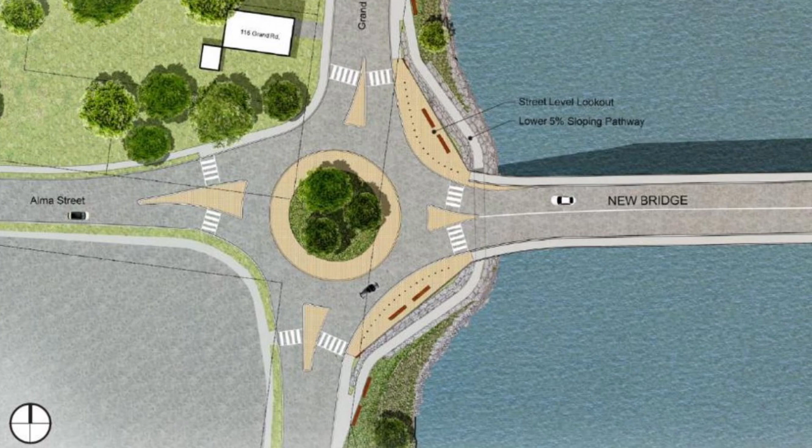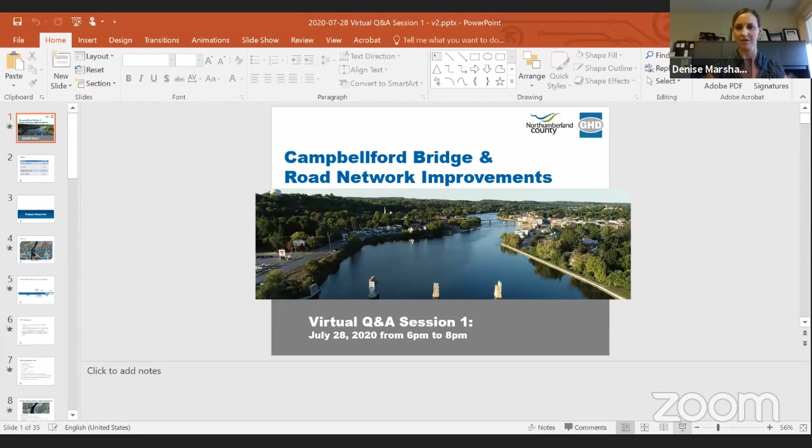I'm Denise Marshall with Northumberland County. We're really happy to present where we're at with the project with the community. It's been a fairly long EA process, and the environmental assessment was approved by the minister in 2017 to construct a new bridge at the location of 2nd and Alma Street. Since 2017, we developed an RFP to retain consultants to start the detailed design process for this new bridge and arterial road network.

In early 2019, we retained GHD, and they've been on board for the last year, and we've been very busy. There's been a number of studies underway to move forward with our design, and you may have seen some of our field staff out doing various types of field work, which Brian will get into in the presentation. At this point, we've reached a 30% or conceptual design stage that we're now ready to share with the public to get your feedback and comments and answer any questions you might have.

We've been doing quite a bit of consultation up to this point with agencies and other stakeholders. This is just extending that consultation process, and it will continue throughout the duration of the project. So with that, I'm going to turn it over to Brian to go through the presentation, and we look forward to all your comments and feedback at the end.

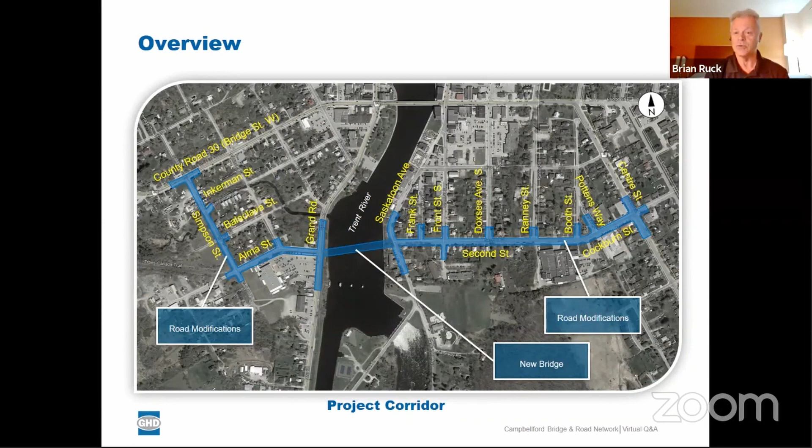The key here is that the bridge is a focal point, but a bridge only works if you have a good road network feeding it. So the project is an arterial road network, and you can see on the screen that there is work both east and west of the Trent River to make the access to the new bridge functional and safe. Denise talked a little bit about this before.

This project, as projects of this magnitude are all the same across Ontario now, takes a long time. A lot of times people get anxious and say, well, when are you doing it? Or don't do it, whatever the case may be. It goes back to the late 80s, and even before that, there were discussions about what happens when the existing bridge needs to be replaced or fixed, and it's already very busy, as everyone on the call knows. There were a lot of pre-studies done up until 2007, and then the EA was approved in 2017, and now we've entered the final design phase.

So it's important to appreciate what is possible with respect to feedback now. The EA having been approved by the province means that the bridge is going to happen sometime, and it's going to happen in the location that the EA identified, within a couple of meters one way or the other.

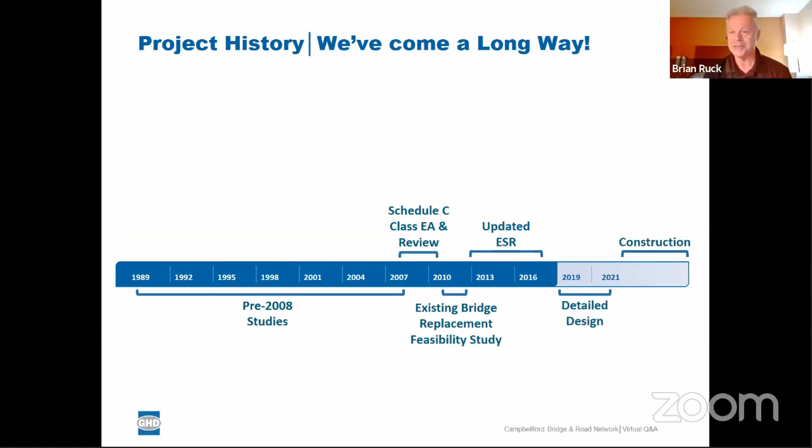So the ability to say, you can still not agree with the bridge necessarily, but the fact is it's still approved and it will happen at some point in time. When an EA is sent to the Ministry of Environment for review and approval, it often comes back with commitments that the proponent, in this case the county, has to address as the project continues to unfold. Now, for a project with this amount of interest and controversy, some of the EA commitments were fairly straightforward.

One was talking about road salt management, and we see that more and more. Road salt is something we're looking at addressing all across the province because of its potential environmental impacts. Every new bridge and significant roadway we're working on, the next point about cycling lanes and pedestrian facilities is something being discussed in every instance, and in most cases, all new infrastructure that's going to last—because a bridge like this will last for 75 years as a minimum after construction.

So even if you don't have the demand for this type of accommodation, the road network and the bridge is not just for cars and trucks. It's for people and for people in mobility. So we talk more about mobility than vehicles. What we've tried to do with the design is make sure all users of the corridor are addressed—not just cars, trucks, fire trucks, and whatnot, but also people walking their dogs and people on bicycles, whether you're a commuter cyclist or a recreational cyclist. So all of that gets factored into the plan.

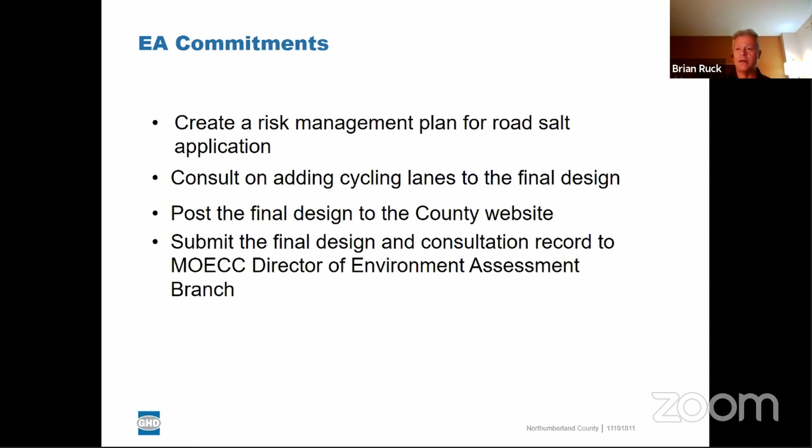And the last two are very simple: the final design will be posted on the website, which would happen regardless. And then the final design and the consultation record, which is a very important part of what we're doing—and that's part of what tonight is all about—gets submitted as well to ensure that we actually have consulted with people and not just heard you, but actually reacted to what you said.

Denise was talking about this. There's a lot of work that you may or may not have observed. Survey work was one of the first things undertaken. Some confirmation of traffic work happened during the EA, and has been updated for the detailed design, along with a number of environmental specialty areas in terms of terrestrial, fish, archaeology, those kinds of things. Most of that has been completed. There's still some archaeological work that needs to be undertaken, potentially even an underwater archaeological study, and we're still working through the details of that.

One of the first things a design firm like ours does when selected for something like this is look at the design that was previously approved and look at ways to identify improvements if possible. A lot of that comes from not saying the work done before was incorrect, but when we have additional information like survey work and some other things, it gives us the ability to look more deeply and more accurately into some other alternatives.

Propose the cross sections for the roads and bridge—you'll see more about that later. There has been a lot of consultation with agencies already, particularly with Trent Hills, and they've been fabulous. Their input is invaluable to hear what the community is thinking and feeling. And Parks Canada as well, because they are the custodian of the Trent River in this area, and part of the heritage network and all of that with the Trent Canal system.

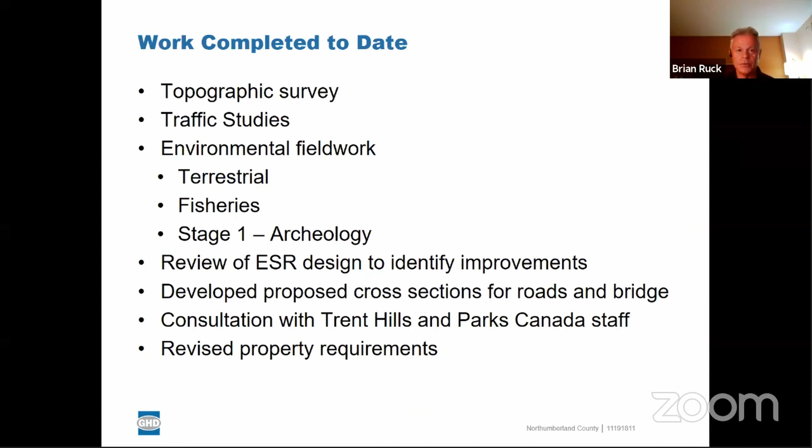One of the things we'll talk a little bit about in the presentation as well is the EA, and the EA had identified property requirements. The nature of a project of this type in an urban area is that you can't construct something like this without having some impacts to property. So the EA identified a number of different things: some homes slated for full buyouts, and some homes and businesses where there's just a partial taking or partial requirement to purchase property to construct the works. During the revisions, one of the things we always strive to do is make that as minimal as possible while still maintaining the facility to all the standards it needs. So we've been able to reduce the property requirements fairly significantly.

So what's changed from the EA? A lot of you may have participated and been aware of what the plan was. At Grand Road and the west end of the bridge, the original proposal was for a signalized intersection, so a set of traffic signals and a left turn lane, various turn lanes in that location.

During the environmental assessment, a roundabout had been explored. Since that time, I have to tell you, roundabouts, I've been doing this for a long time in Ontario and elsewhere. And 10, 15 years ago, the question you'd get from people in agency is, why a roundabout? Now, many years later, after many successful implementations, it's why not a roundabout? We've been able to revise the design that was done in the environmental assessment and propose a modern roundabout at the location instead, which gets rid of the need for traffic signals. I'll talk more about the benefits of roundabouts compared to signals in a few minutes.

Frank Street, located just on the east side of the new crossing, was identified as a closure from 2nd Street with a cul-de-sac, so a turnaround. It would be so there's no access there. We have looked at a few options of doing something a little bit differently there, and one of the options we came up with was a shared, one-way laneway on Frank Street.

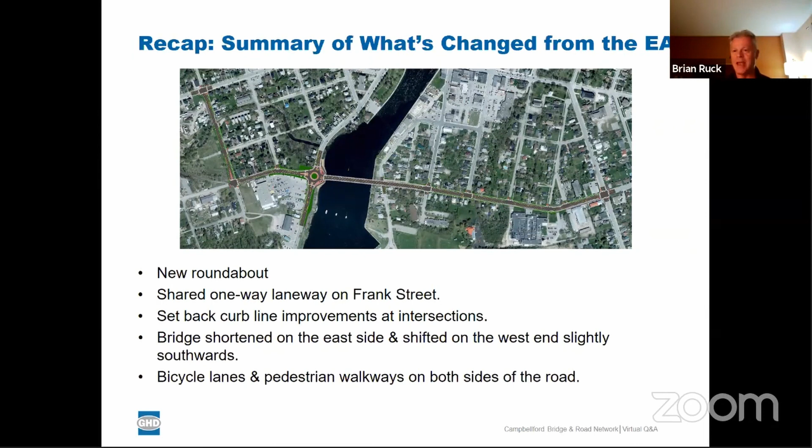I mentioned earlier about the EA commitment about the active transportation facilities, we call them. So we have added bike lanes and pedestrian walkways on both sides of the road and the new bridge, and you'll see cross sections of that as well.

So if we get into the conceptual design, this is what the bridge looks like. This is a combination of artistic renderings and actual on-ground features. So it gives you a pretty good idea of what it might look like, or what it's likely to look like. Key features in this shot are the roundabout at Grand Road, and the bridge, which is the centerpiece of the project. To your left, that big parking lot is Canadian Tire, and just to the south is Tim Hortons, and I'm sure most of you already know that.

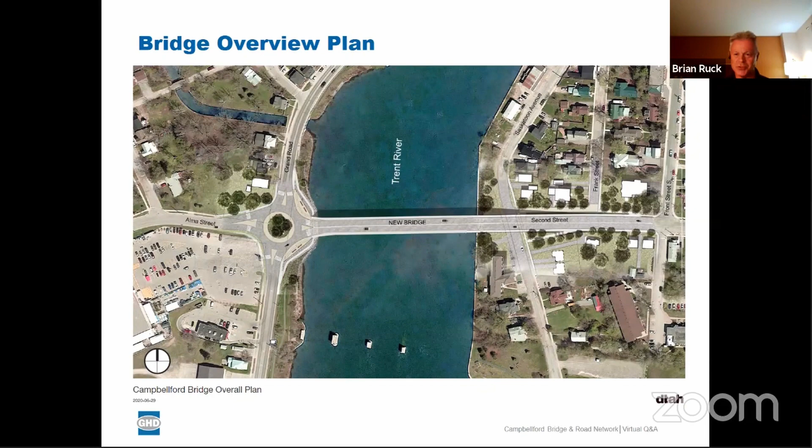On the west side, as I mentioned earlier, this is a material change from what was approved in the EA. The environmental assessment looked at a roundabout, but it sort of held the west side of the Trent River bank, and didn't intrude into the water very much. Now, we have talked to Parks Canada about putting some rock fill in there, which is actually creating some fish habitat, which is a very beneficial thing. And by doing that, we were able to move the roundabout slightly to the east.

That has allowed us, if you see in the top corner here, there's an existing home here and so on to the north. The EA roundabout required the removal of 4 homes on this side. Our proposal is only requiring this one house on the corner. Impacts to Canadian Tire are virtually minimal.

We are proposing a single lane roundabout with pedestrian crossings, and an interesting feature, these are lookouts, benches to look out onto the river. There is a pathway, so those of you walking along the west side and enjoying a nice leisurely stroll, or a bike ride, and coming to the new bridge, we have a pathway that goes down and under the bridge and then up the other side. So there's no need to actually cross traffic if you're continuing just north-south.

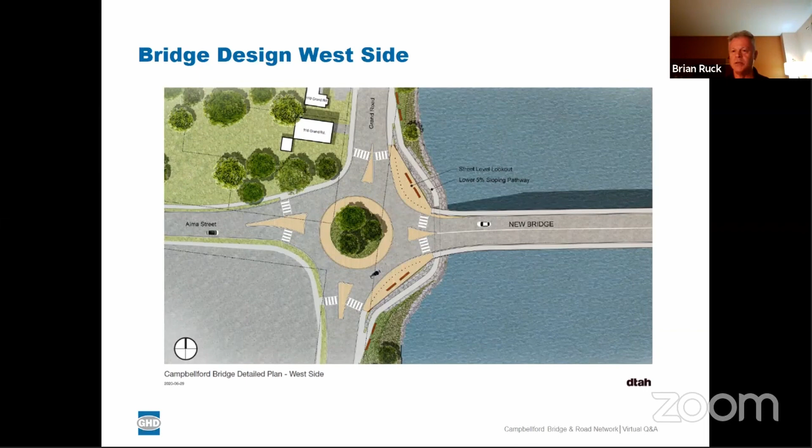On the east side, this is Saskatoon Avenue. The old bridge went as far as here and required Saskatoon to move slightly to the west. We've been able to maintain Saskatoon Avenue in its exact same location, but eliminated what we call the east span, which has actually shortened the bridge and will save a little bit of money.

On Frank Street, I mentioned earlier there was a cul-de-sac, a round bubble that allows vehicles like snow plows, garbage trucks, and recycling trucks to turn around, since they can't turn around in a street this narrow. This shared use laneway, as we're calling it, is a connection between Saskatoon and Frank Street. It's only one direction and narrower than a roadway, going easterly and then northerly on Frank Street. That was the proposal we put forward.

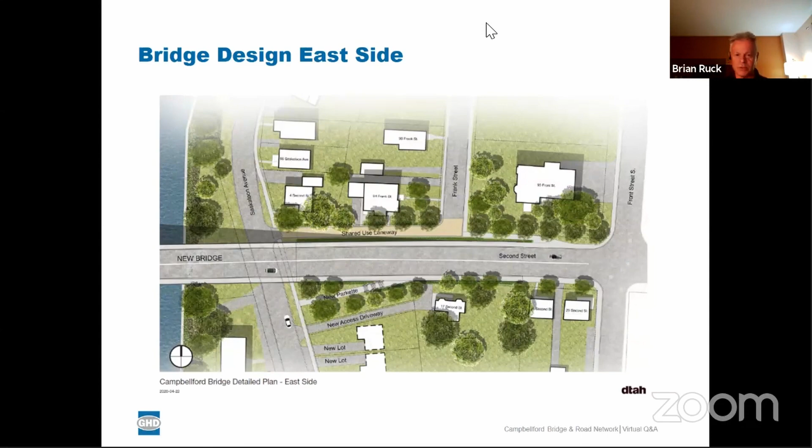Pretty pictures are always nice. Aesthetics is a very important part of this project, as is maintaining the heritage and culture of the town, which is very impressive and enviable to many communities. We've engaged a landscape architect and a bridge architect to make sure what is constructed fits the landscape properly. The firm we picked has done a lot of work in Ottawa, including some impressive crossings of the Rideau River, so we're borrowing some of those ideas.

One neat feature, if you look at this top left image, is the cross section showing what it'll look like crossing the bridge: a lane of traffic each way, a bike lane on the roadway in each direction, and a concrete barrier wall to protect vehicles and pedestrians. We have to protect vehicles from leaving the bridge and ending up in the river, so this barrier wall does that, protecting vehicles from leaving the roadway.

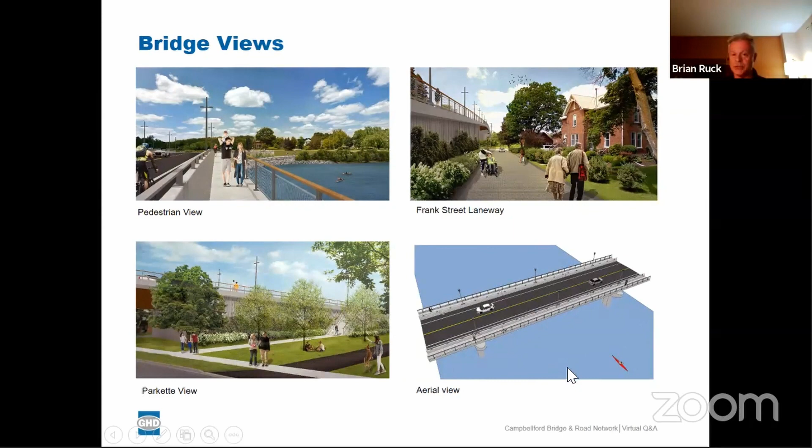Here's an aerial view, and a better one of the bridge, again showing the two lanes, one in each direction, plus the bike lanes, pedestrian areas, and lighting. This shows it a little bit better.

One of the things we're really looking for feedback on is aesthetic features. There are a number of different options we've investigated, and both have been used in Ontario before. One thing we want to make sure of when constructing something like this—earlier I mentioned the bridges last 75 years—but they don't last 75 years without maintenance.

What we don't want is to construct something that requires a lot of maintenance or looks good the first year and then looks lousy afterward. So all the materials selected for railing types and similar things are very durable and rust-free, requiring no more maintenance than the bridge deck would normally require. Typically they have to be fixed up every 25 years or so, depending on usage and other factors.

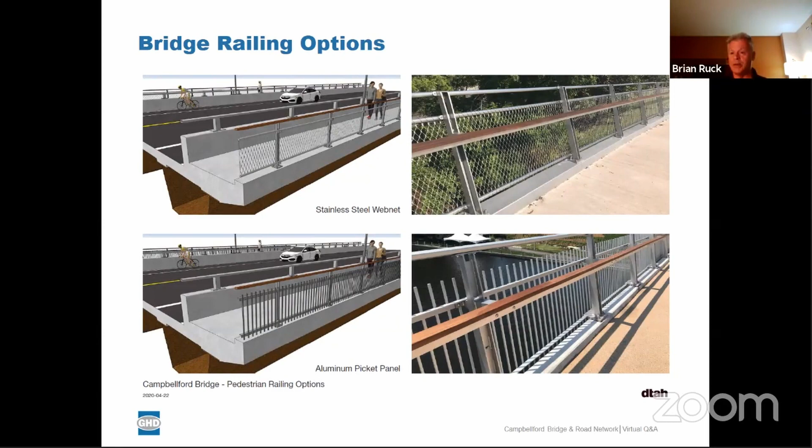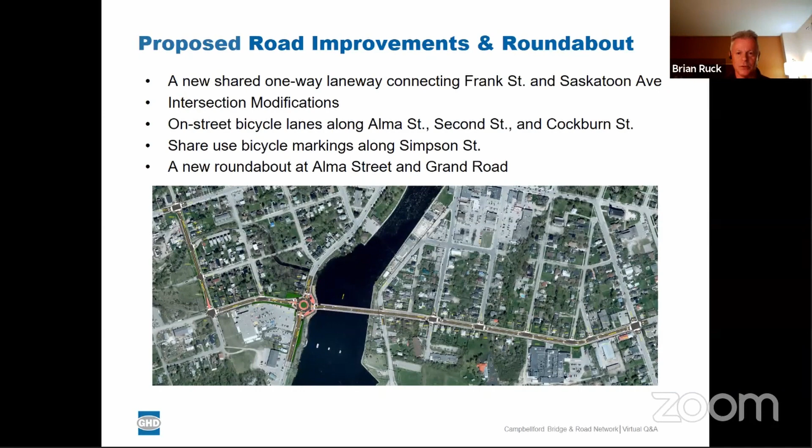So, proposed road improvements include the roundabout and a one-way laneway from Frank Street and Saskatoon. There are a number of intersection modifications required to make the road network function more effectively. On-street bicycle lanes are being added along Alma, 2nd, and Cockburn, with shared-use bicycle markings along Simpson since there isn't enough room for a separate facility. The biggest new feature is the new roundabout at Alma and Grand Road.

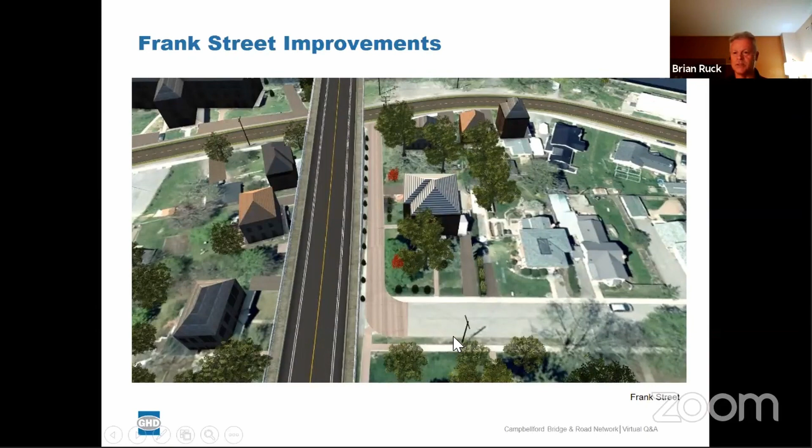At the very west end of the project, at Bridge Street and Simpson, this is one of the areas where a property requirement hadn't been identified in the environmental assessment. However, in order to make this intersection work properly for larger vehicles, we've had to pull back the existing curb line so vehicles can turn without entering the far lane. If someone's waiting to make a turn or go straight, we want vehicles turning right not to interfere with them, so we do have a small property requirement here to address that.

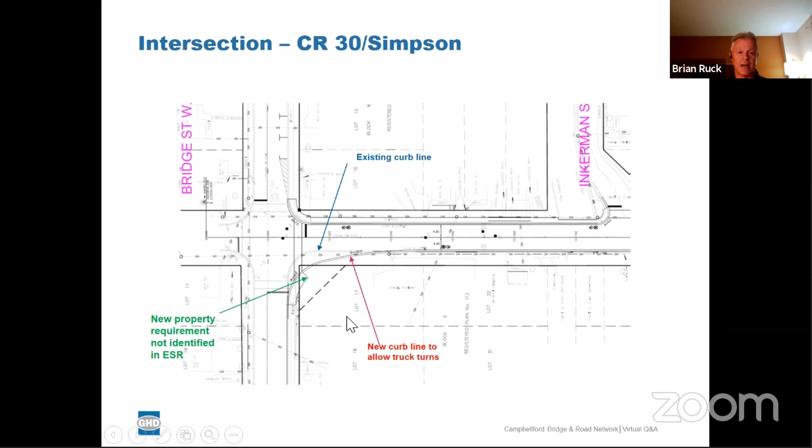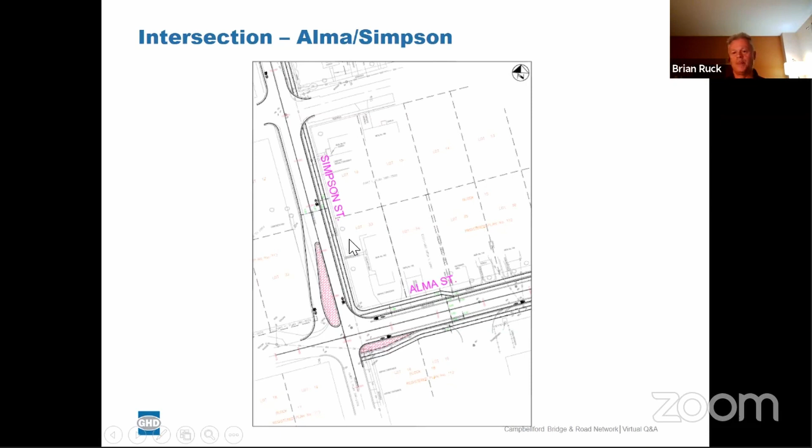The intersection at Alma and Simpson also wasn't addressed as well as it could have been in the EA, in terms of how larger vehicles like a school bus, fire truck, or delivery truck turn, particularly if two arrive at the same time. The current intersection couldn't accommodate that. So we've flared out the southbound piece and provided a small island so that one vehicle can turn this way and another can turn that way without conflicting with each other.

The other area where there hadn't been a property requirement is at the far east end of the project, at Cockburn and Center Street, where similarly we have to pull the curb line back for the same reason, to provide what we call sight triangles. This allows you to see more readily up and down the road, making it safer to make your movements.

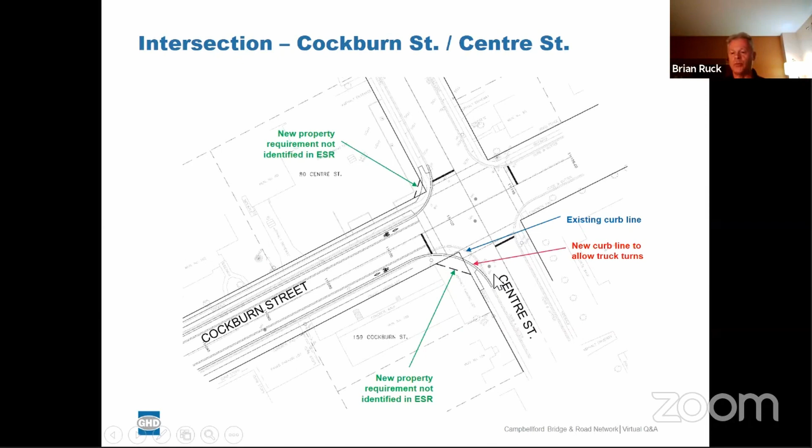We talked earlier about what the road improvements would look like, but I'd rather call it a corridor improvement, a mobility project, because it isn't just for cars and trucks. That's quite a departure from how we used to plan roads 10, 15, 20 years ago, where the focus was making sure cars and trucks could get through and hoping pedestrians could find their way. Now it's a very different, integrated approach to planning.

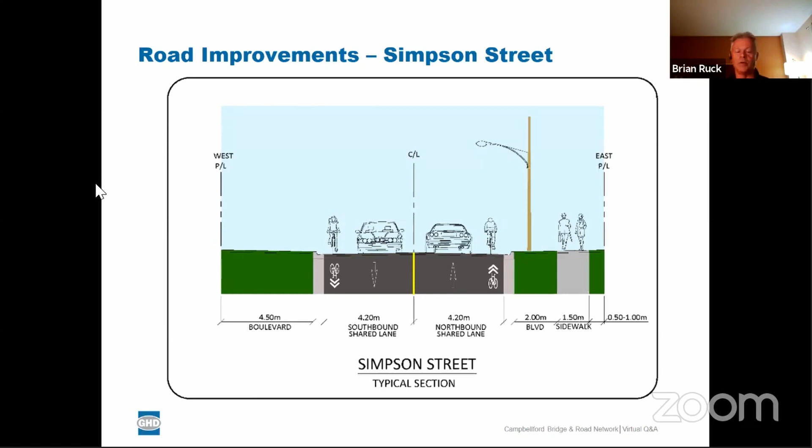You can see here we have a single lane in each direction for vehicles, on-road bike facilities for commuter bikes, and sidewalks on one side on Simpson Street. On Alma, it's a similar design with on-road bike facilities and a meter-and-a-half, or about five-foot, sidewalk. These sidewalks are wide enough that two people in wheelchairs approaching each other can both pass without having to enter the boulevard.

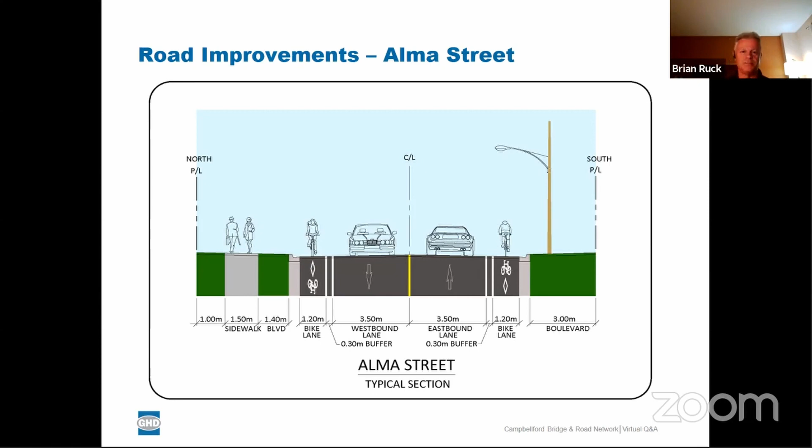On 2nd Street and Cockburn, we have sidewalks on both sides along with on-road bike lanes, and again one lane in each direction for vehicles, plus boulevards that pull the sidewalks a bit further from the road. This makes it more pleasant for people walking, and also gives us somewhere to put the snow in the wintertime.

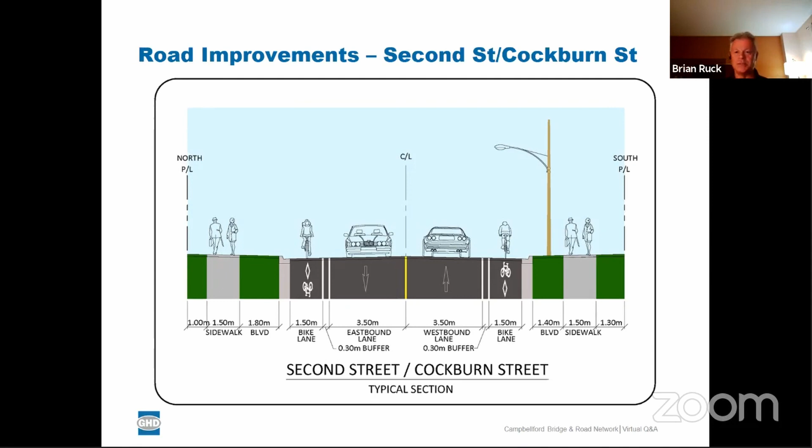As I mentioned earlier, there's been a real change in approach in Ontario and the rest of North America in the last 10 to 15 years regarding roundabouts. A lot of it has come from familiarity, quite frankly.

When anything is new, people are a little afraid of it potentially because they're not sure how to drive it, not sure if others know how to drive it, how to walk through it, how to cycle through it. The reality is those initial fears may be somewhat founded, but as you see more of them, they really are fairly easy to figure out.

The reason they're becoming so popular is quite frankly because they are a lot safer than a signalized intersection. People often think that if you throw up a set of traffic signals, all your safety issues go away, but that's not the case in many areas because you still have the ability to have high speed collisions.

A lot of people on the call may be drivers, and we've probably all experienced near misses where you're waiting to turn left at a signal and you're not quite sure if the oncoming driver is going to stop on the yellow or almost red light, or come through. Many of the serious accidents at signalized intersections are exactly those turning maneuvers, and they happen at high speed, leading to injuries and unfortunately fatalities at times.

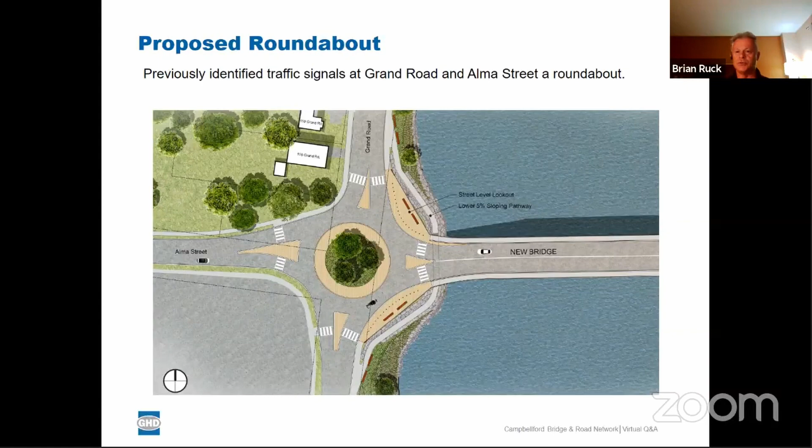Roundabouts virtually eliminate that. They really control speeds because you simply cannot navigate through a roundabout quickly—the operating speed is usually about 15 kilometers an hour or so. So by nature it slows traffic down. Often at an entryway to a community where people have been driving at high speeds on a provincial highway or county road, this tells drivers their driving pattern needs to change, and it really encourages them to change their driving behavior.

There's a lot of stats out there about the traffic calming effects. But the real critical one, in my view, is that injury collisions are reduced 75% and fatals by 90%. We'd love to see that at 100%—all of us would like to see those numbers at zero, no fatalities, no collisions—but the reality is they happen sometimes. So can we do something to mitigate their impacts? That's really what this is all about.

The other benefit is not just safety, but traffic flow. Have you ever come up to a signalized intersection in off-peak hours, hit a red light with nobody coming the other direction, and wonder why you're stopped? Well, at a roundabout you don't have to stop—you only stop if there are vehicles in the roundabout, otherwise you're free to go. By virtue of that you get reduced emissions and decreased fuel consumption, which is good for all of us as we try to green up our planet.

Active transportation at roundabouts is one of the most challenging topics—people have a misunderstanding that roundabouts are more difficult for pedestrians and cyclists. In fact, the reality just doesn't prove that out. It's true it may take a bit of getting used to, but we'll show you a couple of things we've added since last time about how people navigate that.

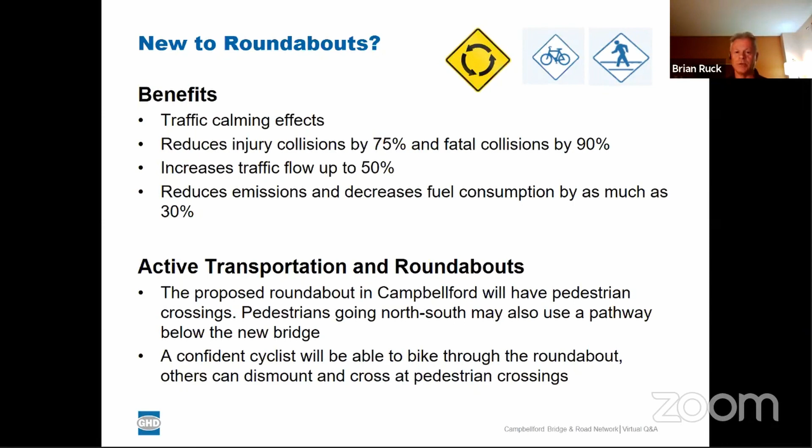We'll talk a little bit more about that in a minute.

One criticism we've heard is that a roundabout can only handle cars. What about a fire truck? What about a school bus? Or, something that's come up quite a bit lately, what about large farm vehicles? We were doing a project for Region Durham on Taunton Road, where 3 or 4 new roundabouts are proposed, and that was a big concern of the farming community: we have these extra large vehicles, so how are we going to get through? We designed our roundabouts at the concept level to make sure all of those vehicles can safely navigate through.

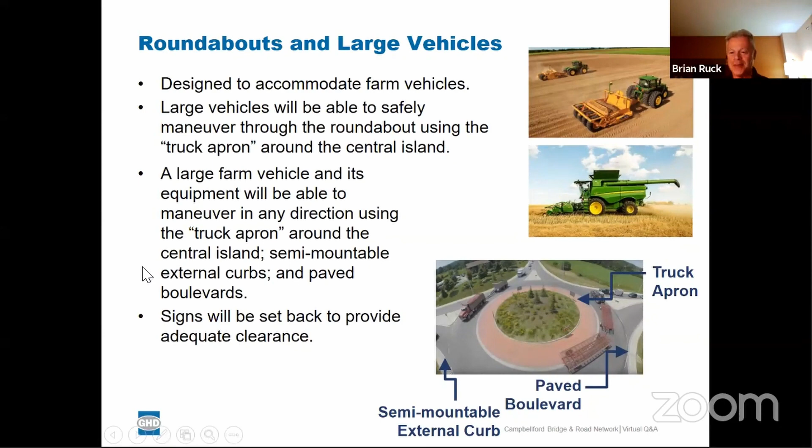Normal sized vehicles use the paved roadway, while oversized vehicles track onto what we call the truck apron. This is still a paved surface, usually different colored asphalt, but the vehicle tracks over it. You can see how this double trailer is tracking on that, but it can still make all the moves very safely. The other thing we can't forget is to place the signs far enough back that one of these big vehicles doesn't knock them all down when it goes through. That's something we make sure we do as well.

I'm just noticing that I think you have our version of the July presentation. Oh, so you're going to flip back. You're going to give me the new version. I'm going to take over and allow you to talk about the accessibility that we've added. All right, so I'm going to stop sharing there, and you're going to give the new version.

This is something we have added since the last time. We heard from some visually impaired people about, okay, what about me? How do I get through something like this?

So, the crosswalks. Let's talk about cyclists first. A confident cyclist will ride through the roundabout with the vehicles. Others who don't feel so confident doing that can get off their bikes and act like a pedestrian through the roundabout. Now flipping over to how pedestrians occupy it.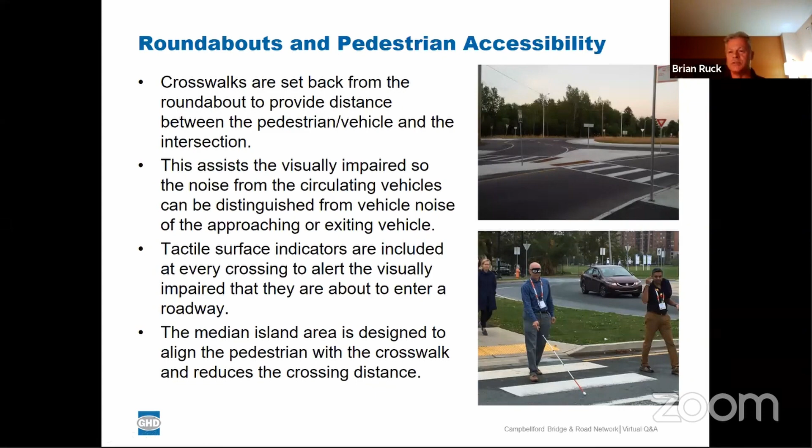It helps people who are visually impaired because they can hear the noise, getting their cues from something other than seeing. These tactile surfaces let them realize they're coming to a crossing, that they're not on a sidewalk any longer. The median here provides a refuge, so people are only crossing one lane of traffic at a time. That's a real benefit compared to a signalized intersection, where you'd be crossing multiple lanes at the same time.

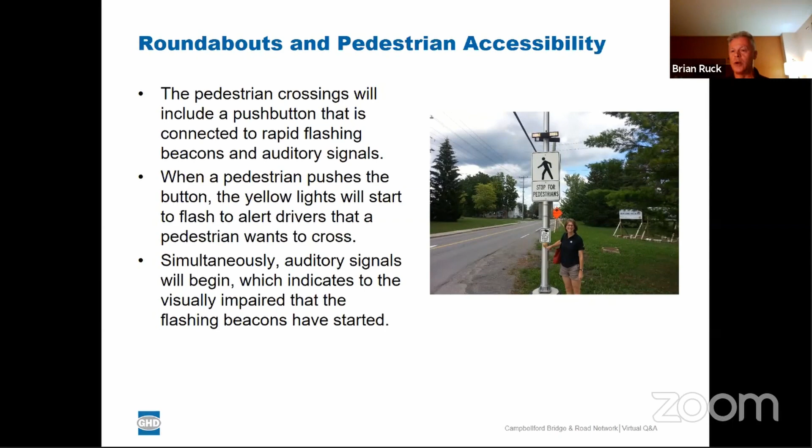That's actually our traffic engineer, Vanessa, who's probably much more qualified to talk about this than I am, but nevertheless, I'll do it. There are other things we're proposing to add to really help with that, including an on-demand pedestrian signal crossing. You push the button when you want to cross, the lights activate, and it tells drivers there's a pedestrian waiting to cross. Then the vehicle has to yield, as they do at a regular intersection, to the person crossing. We will also have auditory signals, so people can hear that the signals have been activated.

And I talked about that.

Natural environment was obviously a big thing during the EA, and it continues to be during the design. So, trees, landscaping and vegetation—some landscape vegetation will have to be removed during construction. But as I mentioned earlier, we have a landscape architect on board to enhance the landscape once we're finished. It's normal practice to make sure trees and vegetation are only removed during appropriate times of the year, so it doesn't affect breeding birds.

Chimney swifts, and various species of at-risk bats—if they're identified, and really they haven't been to any great degree in this area, there will be targeted surveys completed at certain times of year. These are very time sensitive, to ensure that any species at risk identified is appropriately managed. And of course, fish and vegetation within the Trent River.

With proper mitigation, there's a couple of things. First, there's the construction impact itself, where we're in the water building piers, and that's very tightly controlled. The Trent River in this area has mostly a rock bottom, so there isn't a lot of sediment around, which is beneficial for us. But the areas around the construction zone within the water will be contained, so any silt churned up by construction operations will be contained. And as I mentioned earlier, we have the opportunity with the pathway we're proposing on the west side to actually create some additional fish habitat and breeding habitat as well, so that's a benefit too.

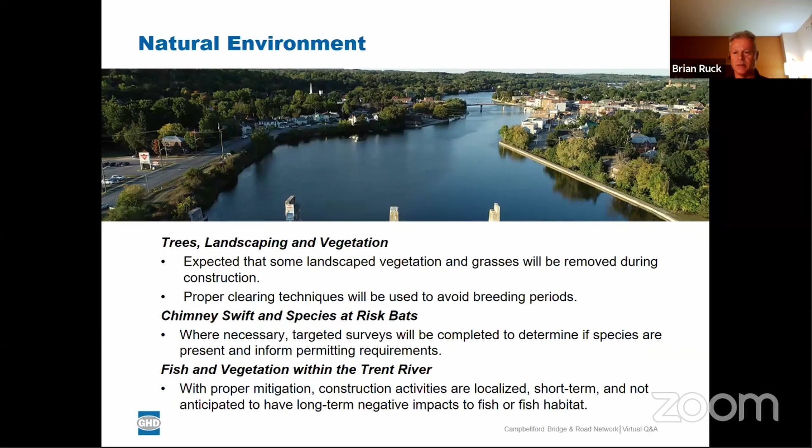Archaeology - the area is for the most part built up, so there isn't a lot of archaeological potential. There are a couple of areas being investigated now during what we call stage 2, which is digging test pits to see whether areas identified as stage 1 that had some potential actually do. You may or may not have witnessed some of that work - there isn't big bells and whistles going on with it, it's people with shovels digging small test pits. That'll be completed by this year.

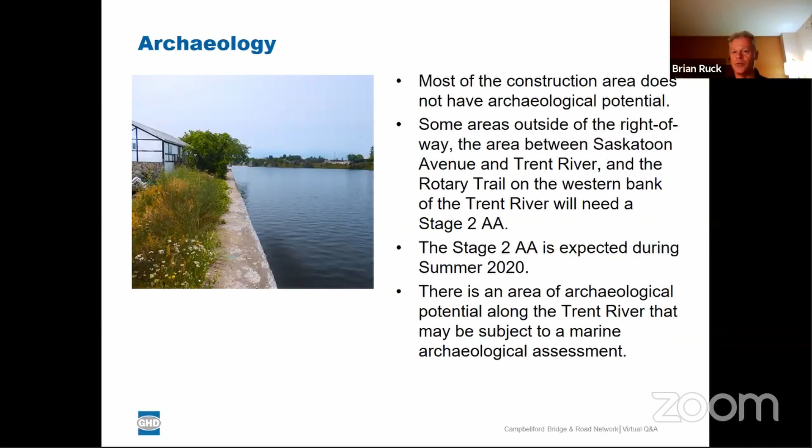And I mentioned earlier that there is an area in the Trent River, potentially in the crossing area, where we may need to do an underwater archaeological assessment as well.

Cultural heritage, designing with the Trent River - we are very conscious of the heritage value of Campbellford, and the new bridge is not going to be an ugly 401-type functional bridge. It's going to be very sensitive to the colors and natural heritage of the area, using materials that blend in, using design features that are sleek and very attractive. We want to collectively walk away with something that everyone is very proud of.

There are a number of heritage properties in the area of construction. There's a couple of homes that definitely have to be removed at 120 Grand and 109 Saskatoon, and that's the area where the potential parkette could be put in. There are a couple of other homes that are going to have some impacts, and we're working towards that right now. There are an additional 42 properties of significance along the road improvements, but not directly impacted by any of the work.

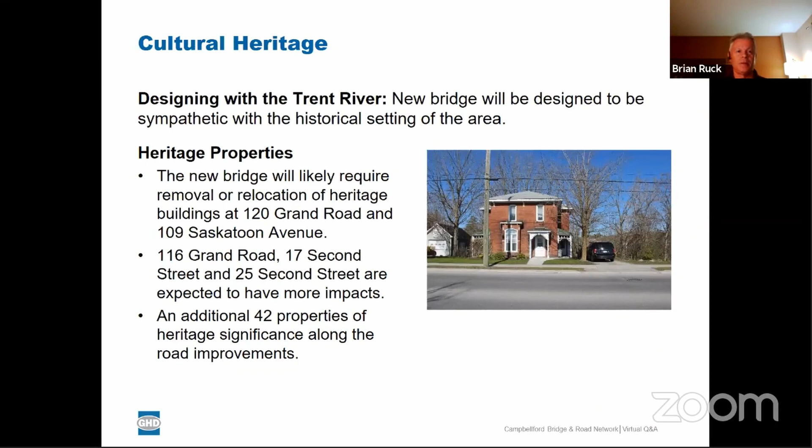Construction - there's two types of noise. There's construction noise that ends at the end of construction, and then there's the noise from vehicles.

When we do our noise assessments, the first row of homes along the corridor is considered to be potential noise-sensitive areas, and they are the ones studied to check what the change in noise levels will be based on projected changes in traffic volumes. The study has been done - I'm not sure if it's available on the website yet, Katrina, but if not it will be - and it shows that the noise changes are expected to be well within provincial guidelines, so there isn't really any requirement for noise mitigation.

During construction, I know those times look very early, 6 a.m. to 9 for construction noise. That could change during the course of design and through tendering - that's within the control of the local municipality with their noise bylaw, what they allow. There's also a protocol during construction that if people are unhappy with what they're seeing, there'll be an on-site person they can talk to and have their concerns heard and addressed. And then normal stuff like maintaining construction equipment so it has proper muffling, and limiting operating time to daylight periods.

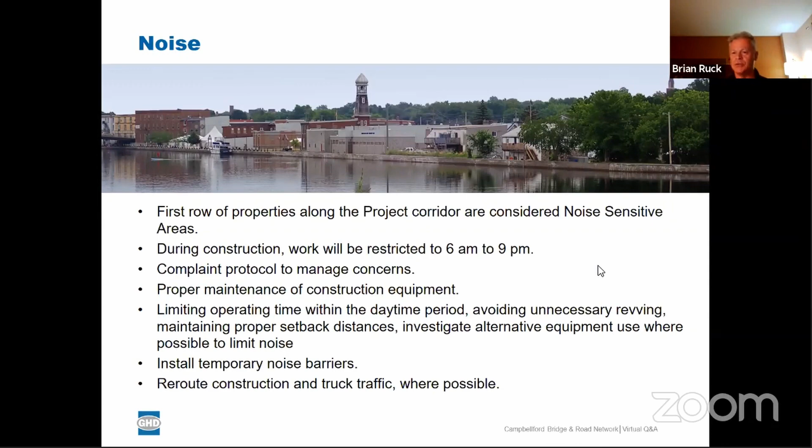Next steps, feedback - as Denise mentioned earlier, and Katrina as well, we've approached what we call the 30% design. The next step is to take the comments we've received and address them, and then move on towards the 60% design. The design is expected to be completed in 2021, which will allow utility relocations, property purchases, and things like that to occur.

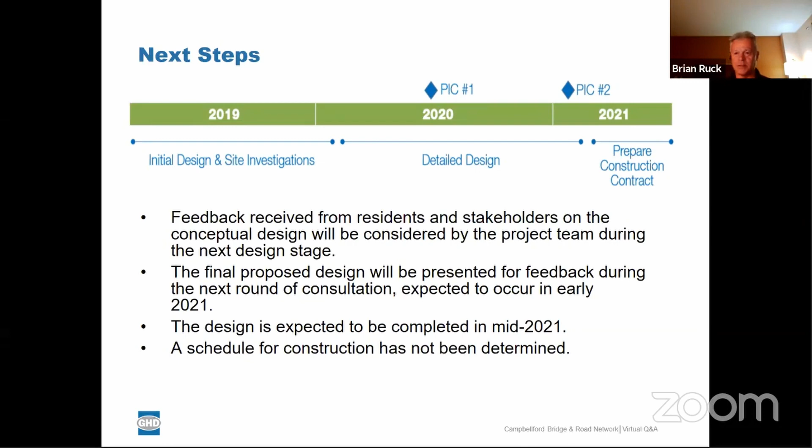I'm sure a lot of you have questions about the schedule of construction, and I usually defer those to Denise. At this point, I think it's safe to say that it isn't yet scheduled for construction. There's funding that needs to be in place prior to that happening, and Denise can address that more in the Q&A if anyone wants to hear further about it.